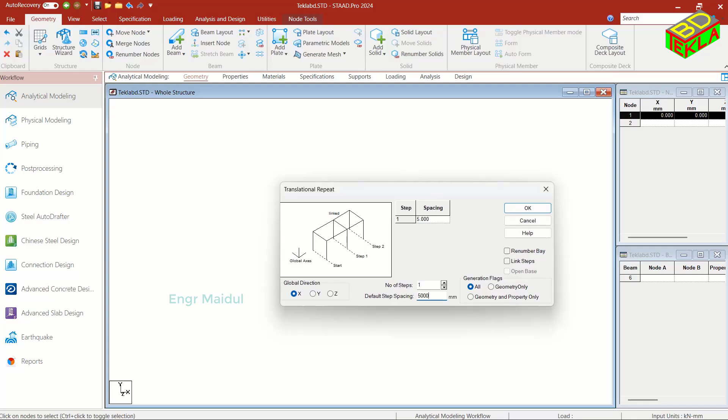Select node cursor. Geometry, translational repeat, x-axis 5000 mm, no of steps 5. Okay.

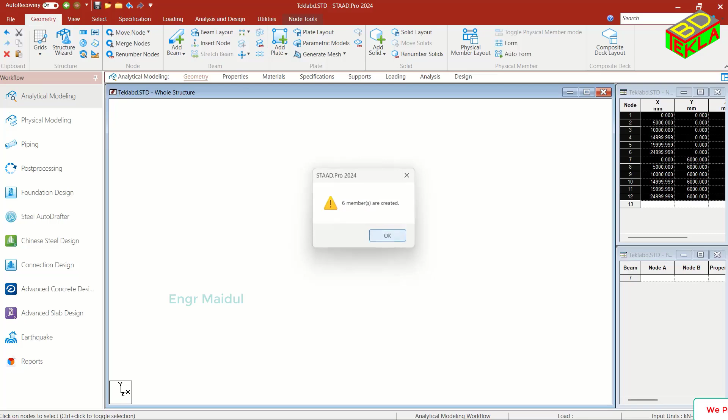Control C, Control V, y-axis 6000 mm up. Select all. Current beam at y-axis. Okay, add beam.

Select beam, beam tool, insert node midpoint. Okay.

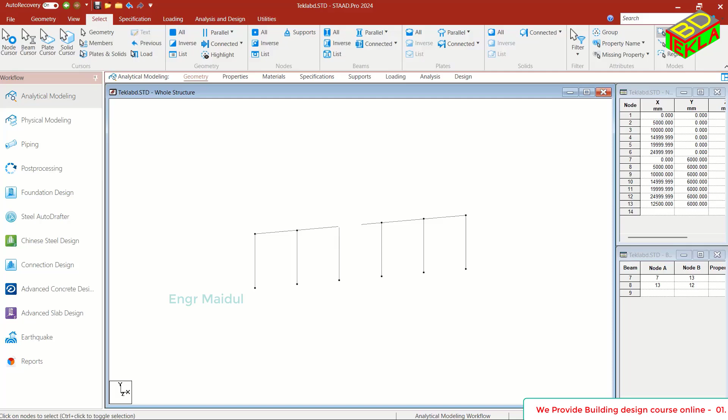Select node cursor. Select Ctrl C, Ctrl V, 1000 mm up. Okay. Then this geometry, add beam.

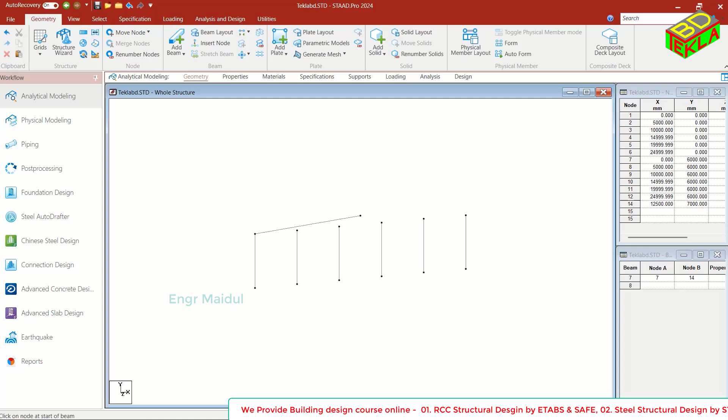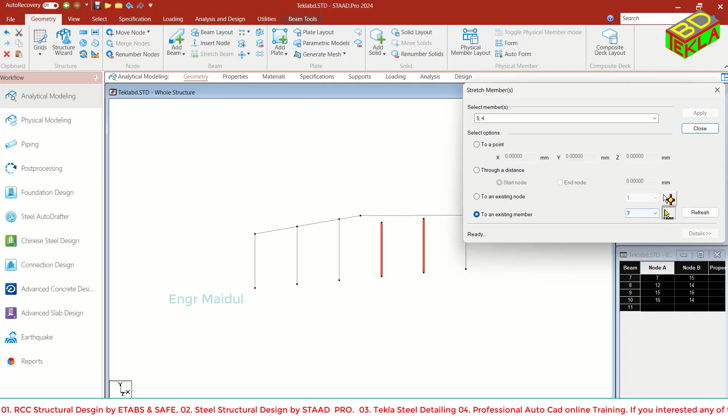Select beams, beam tool, stretch beam to an existing member, select member, apply. Again select opposite beam, apply. Okay.

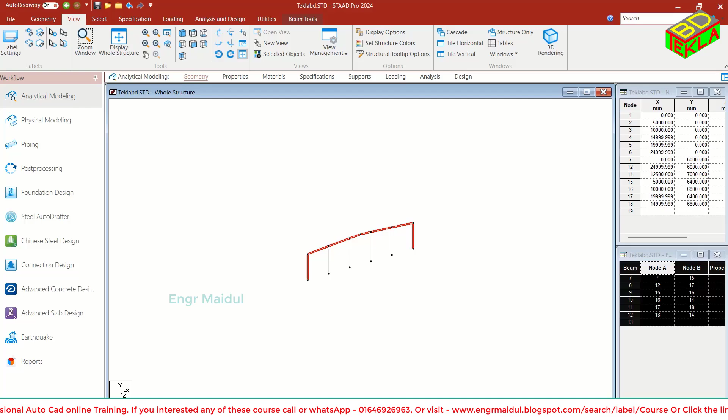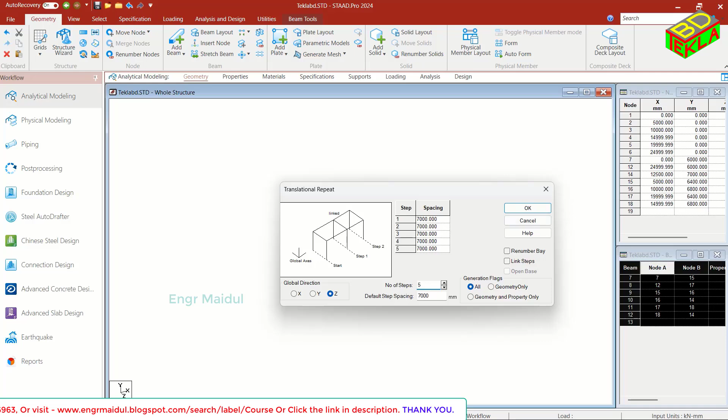Select transition geometry, translational repeat, z-axis, 7000 mm, 5 span. Okay.

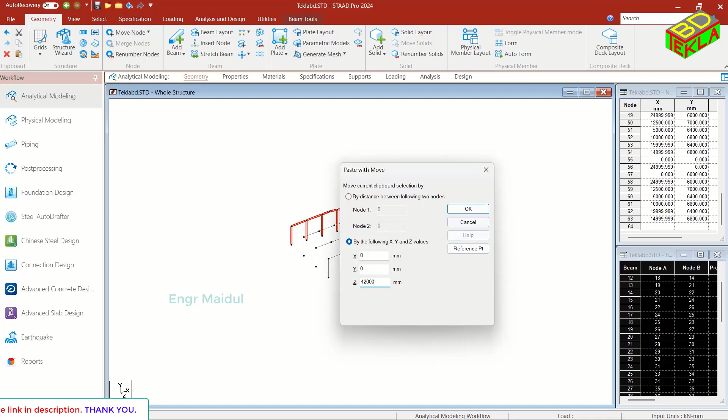Okay. Select, I do it 1, 2, 3, 4, 5. Ctrl C, Ctrl V, z-axis 42000 mm. Okay.

Then view, front view, select. Oh sorry, node cursor, view, front view, select.

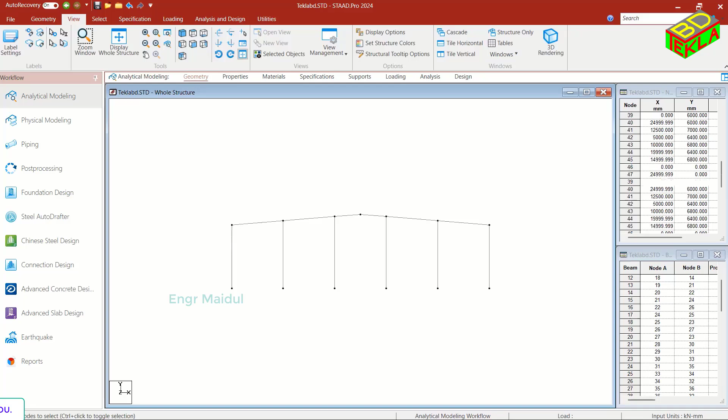So geometry, connect beam along z-axis. Members are created. Okay, nice. Select

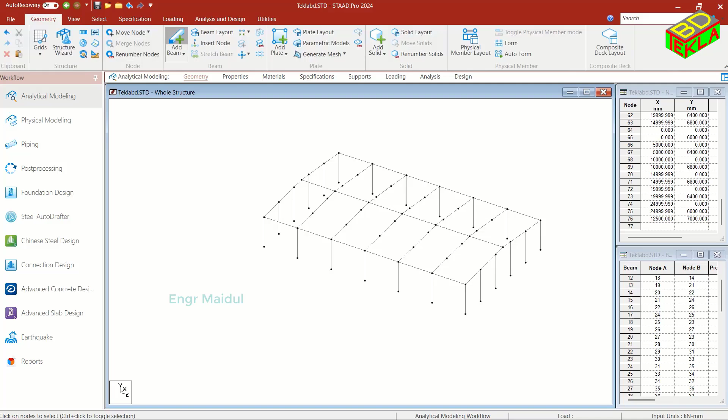Geometry, add beam, select bracing, Ctrl C, Ctrl V, reference point. Okay.

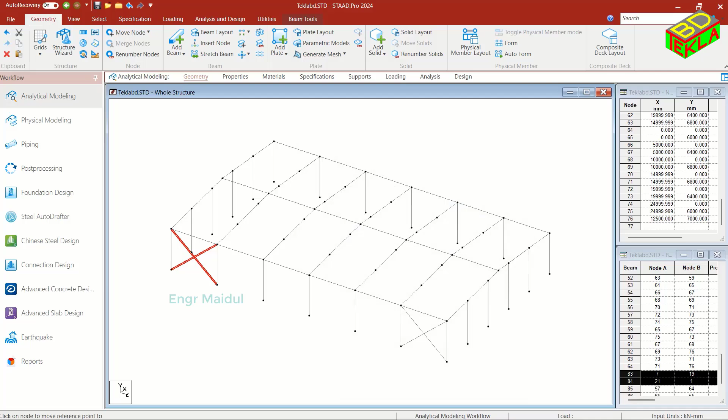Opposite side and opposite side. Okay. Again bracing,

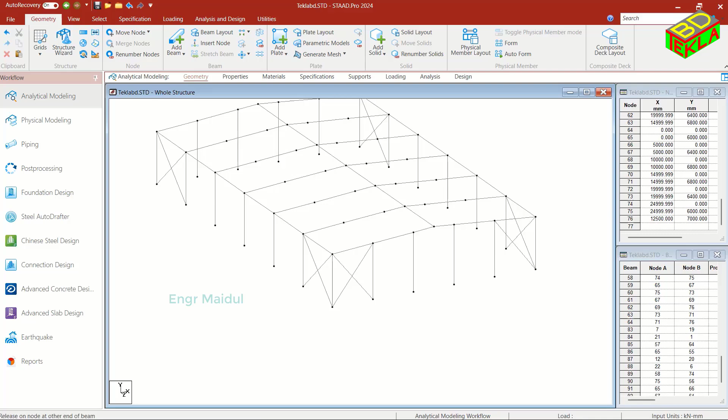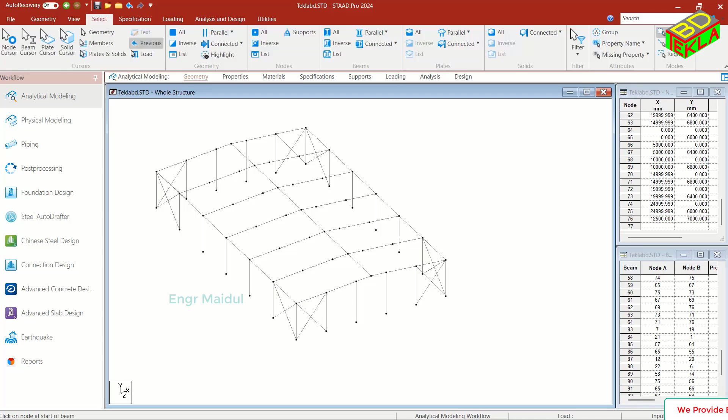Now select beam parallel to Y, view, selected object. Okay.

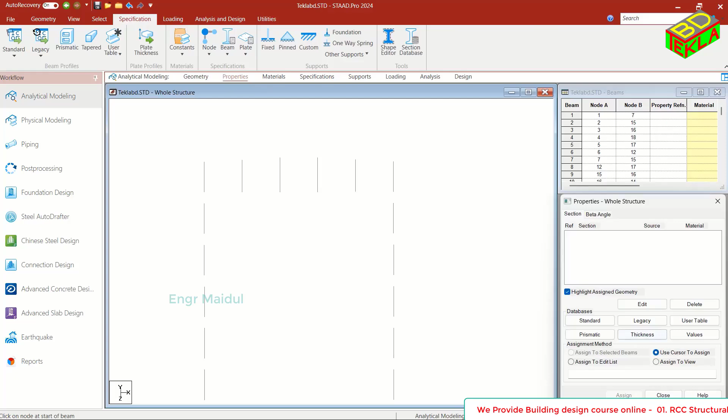Now properties, where is properties, Tekla, select columns, assign to selected beams.

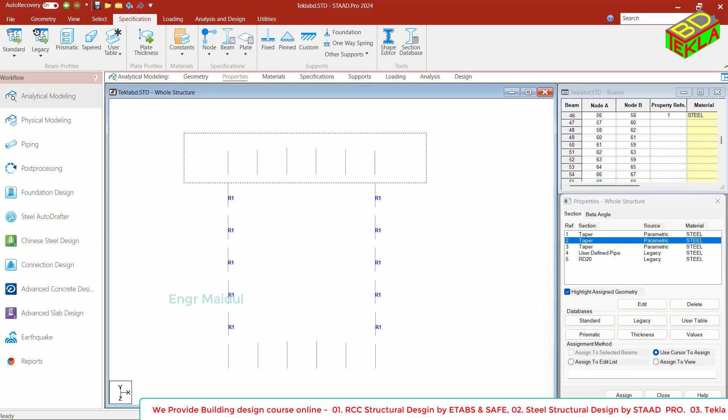Taper, assign to selected beams. Then view display whole structure. From view,

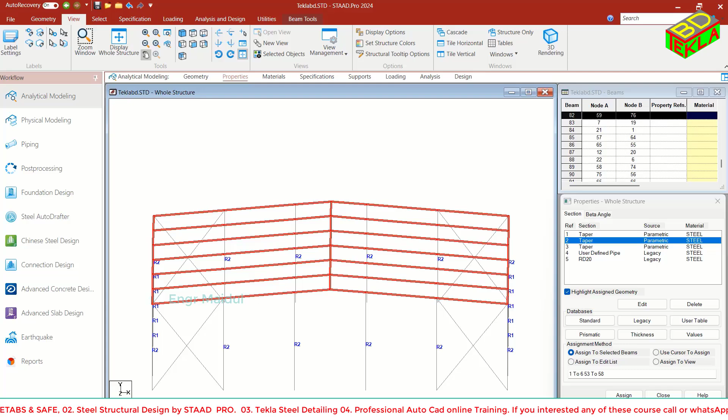select top, select selected object, geometry, add beams,

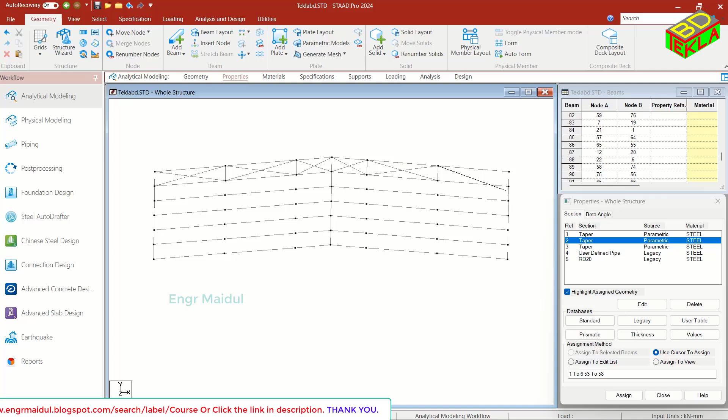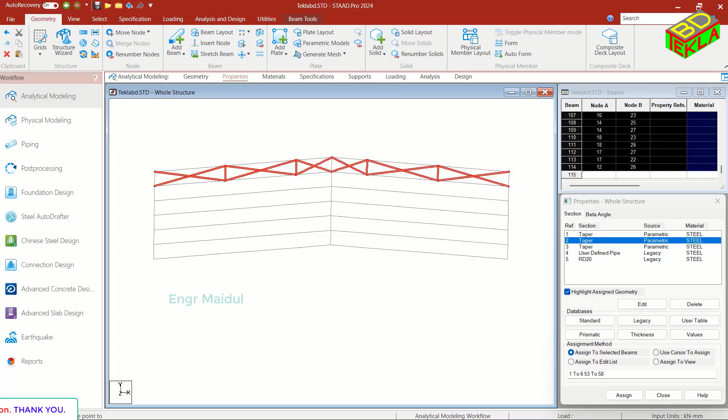Select all beams with bracings, Ctrl C, Ctrl E, reference point. Okay.

Now select side parts, select tapered parts. This will be tapered.

Select tapered parts, assign to selected beams. Select all other parts.

Select also gable sides. And again, select also gable sides.

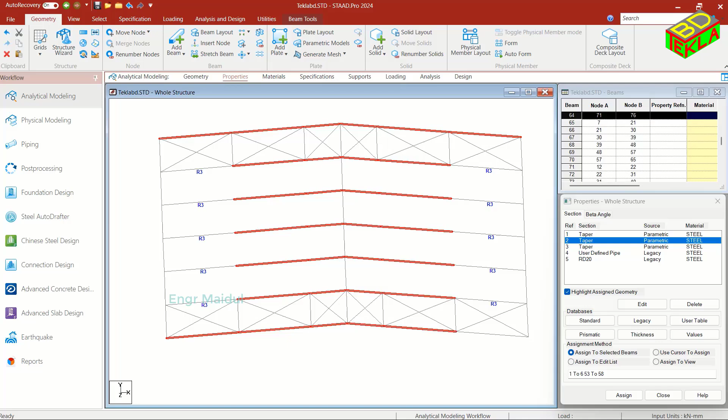Okay. Assign to selected beams. Okay. Then view, front view, select pipe,

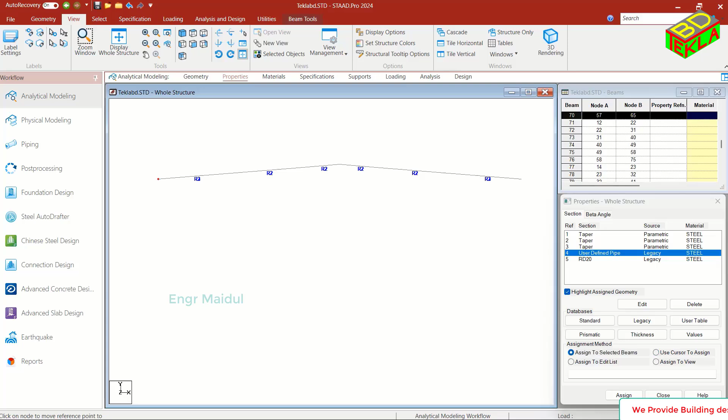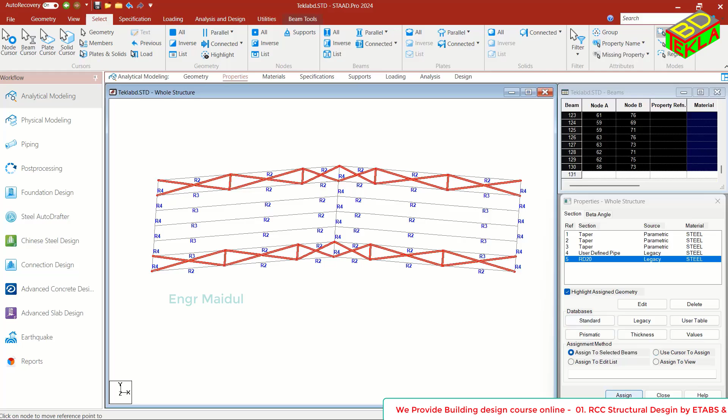And assign to selected beams, and then rod, then select missing property and select and assign rod bracings.

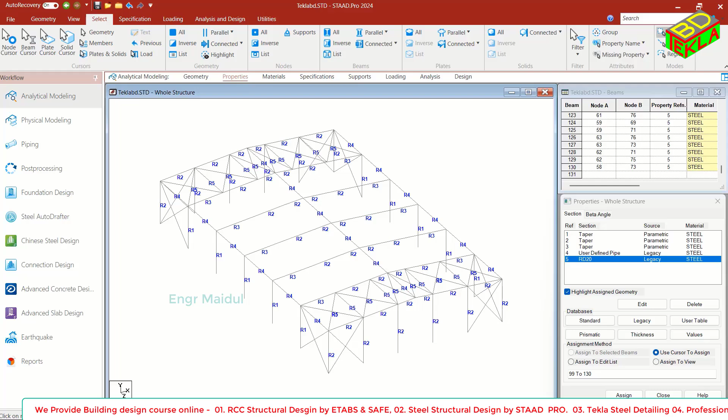Okay, view display whole structure, select missing property, first pipe, then select missing properties and assign them to pipe bracings.

So our modeling is complete. We should go for 3D rendering, and that should be our 3D.

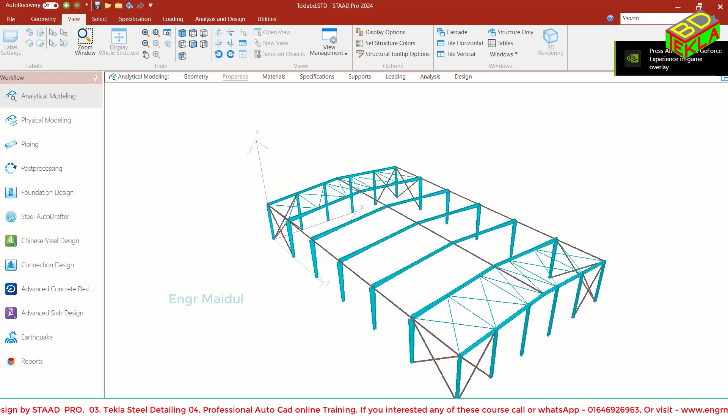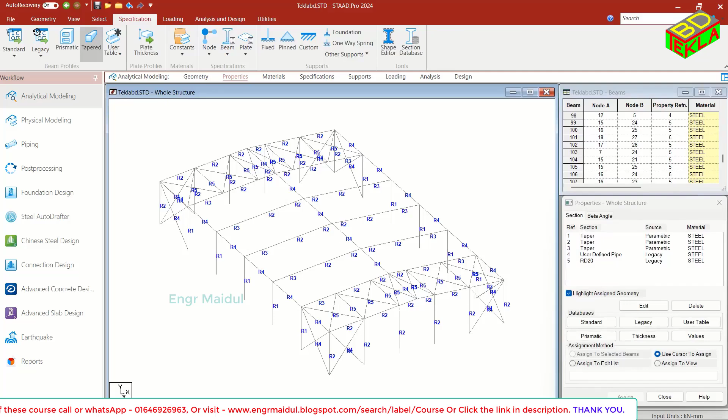The columns are tapered. Another one, the gable column might be at 90 degree. Then we go for view, front view, see beta angle, create beta angle 90 degree. Okay,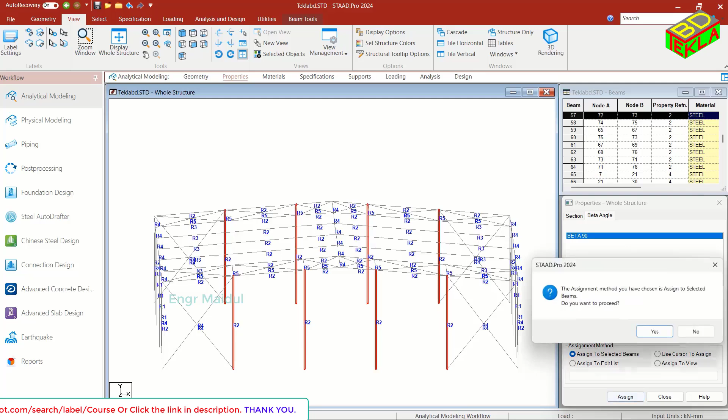Then we select this column and assign to selected beams. So we go for 3D rendering.

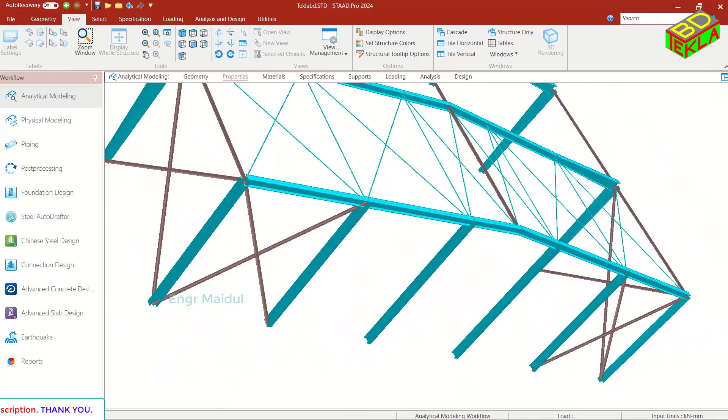These columns rotated to 90 degree, and these columns are tapered. See, these columns are tapered, and this portion of the beam also tapered, and this is straight.

So this is a 3D modeling of a building within 10 minutes.

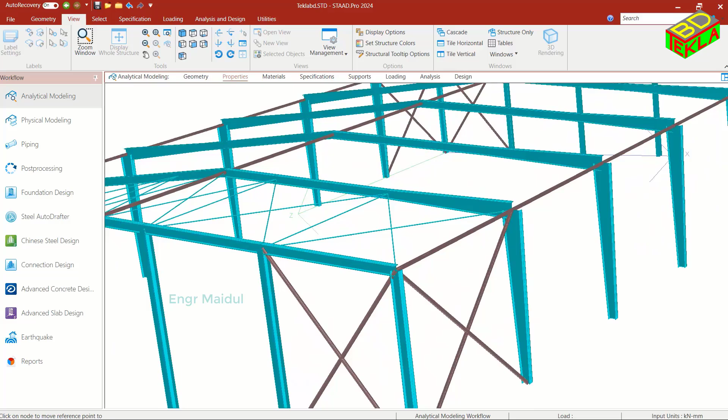Staad Pro is not that hard. Basically Staad Pro is very easy software, but you need to learn them in a good way, and for steel building design you must have sufficient BNBC knowledge over it, and also ASCE 7-05, UBC and IBC codes. That's all. Thank you.